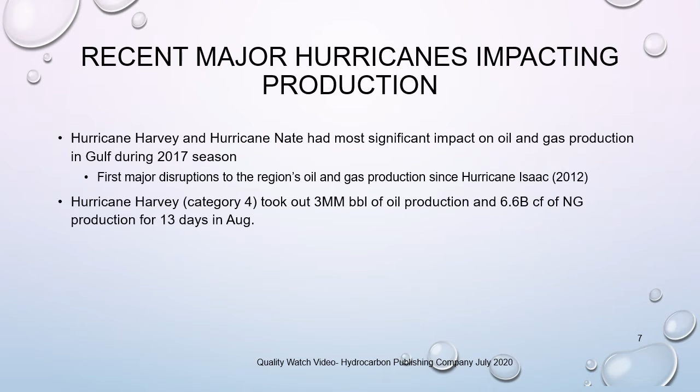The 2017 hurricane season saw Gulf of Mexico oil and gas production impacted by Hurricane Harvey in August and Hurricane Nate in October. The two hurricanes represented the first major disruptions to upstream operations in the region since Hurricane Isaac in 2012. Hurricane Harvey was a Category 4 storm that took out 3 million barrels of crude oil production and 6.6 billion cubic feet of natural gas production in August. Later that year, Hurricane Nate, a Category 1 storm, took out 8.4 million barrels of oil production and 11.8 billion cubic feet of natural gas output in October. Even though Nate was a smaller hurricane, its trajectory made it more disruptive to Gulf of Mexico production compared to Harvey.

Nearly a decade earlier, in 2005, Hurricanes Katrina and Rita, and in 2008, Hurricanes Ike and Gustav, had more significant impacts on upstream operations in the Gulf. These cases show how operators in the Gulf may often have to deal with hurricanes and associated issues.

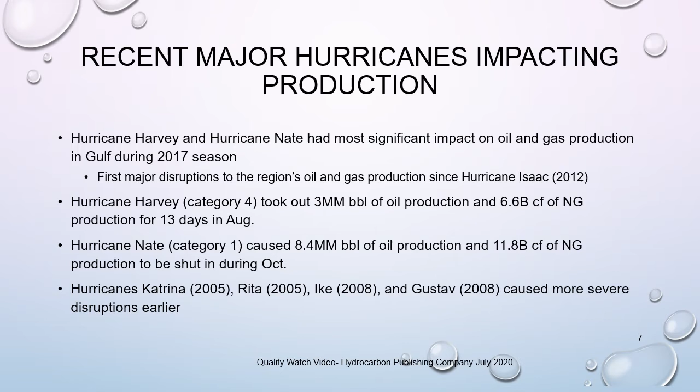If the hurricane threat is high, all manpower except essential personnel will be flown onshore to relative safety, and in many cases this results in wells being shut in for safety reasons. With any action as significant as shutting in a well, there are steps which have to be taken to safely carry this out. A depressurization of the near wellhead area must take place, and this can cause hydrate formation in the wellhead, jumpers, or pipeline as the temperature and pressure drop. This is a serious event which can take weeks to resolve.

To prevent this from happening, an inhibitor is used. Most commonly methanol or glycol is used as thermodynamic hydrate inhibitors. Monoethylene glycol has also been used by operators in the North Sea. Other inhibitors are also used, such as low-dosage hydrate inhibitors, and many of these have a methanol or isopropyl alcohol carrier. Meanwhile, methanol may remain in the oil phase after operations are started.

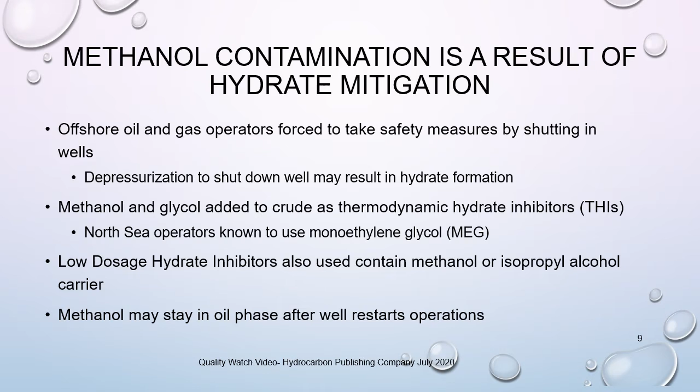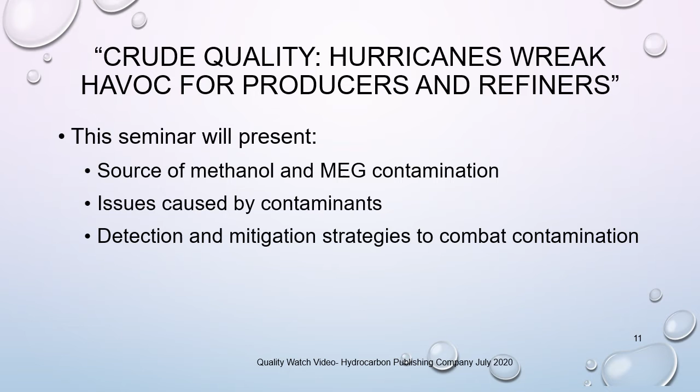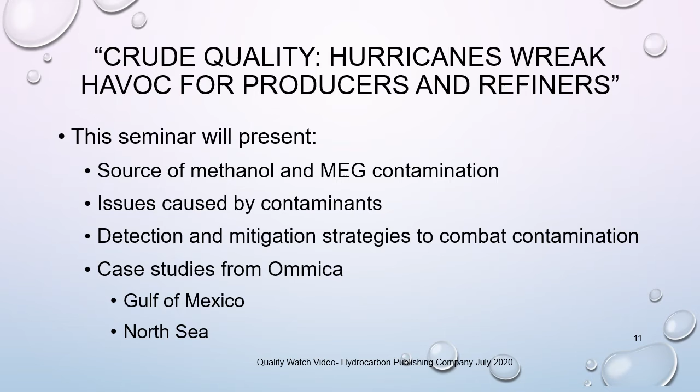This seminar will focus on the sources of methanol and monoethylene glycol contamination in crude oil. Issues caused by contamination for the refinery setting and for vendors will be covered. Detection and mitigation strategies will also be discussed. We will present 3 case studies from Ommica, 1 in the Gulf of Mexico and 2 in the North Sea. This webinar will take advantage of experiences gained from North Sea events to help operators deal with well shut-ins because of hurricanes in the U.S.

Methanol contamination may result in reduced value and increased costs. These financial impairments may come in the form of waiver fees, delays, and deferments. In addition, an installation with a history of selling crude with methanol contamination may find it increasingly difficult to sell volumes to customers.

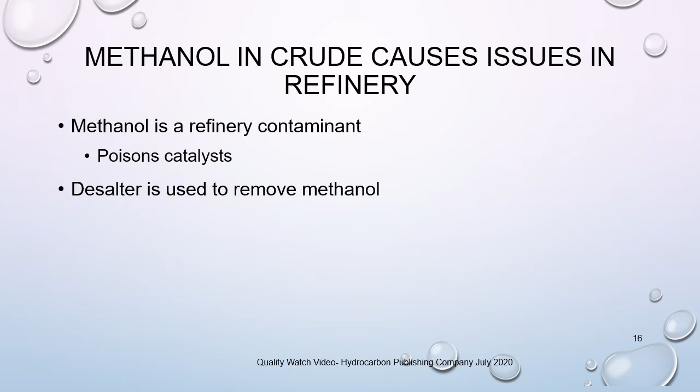Methanol is considered a contaminant in the refinery. One major issue with refinery contamination is the poisoning of catalysts. As a result, crude oil is fed through a desalter in order to remove methanol and other water-soluble contaminants. The wastewater from the desalter is then treated with microbes. However, excess methanol content may kill the microbes used in the water treatment process, which will pose an environmental hazard when the wastewater is released. In addition, methanol contamination in crude lowers the crude cloud point, or wax appearance temperature.

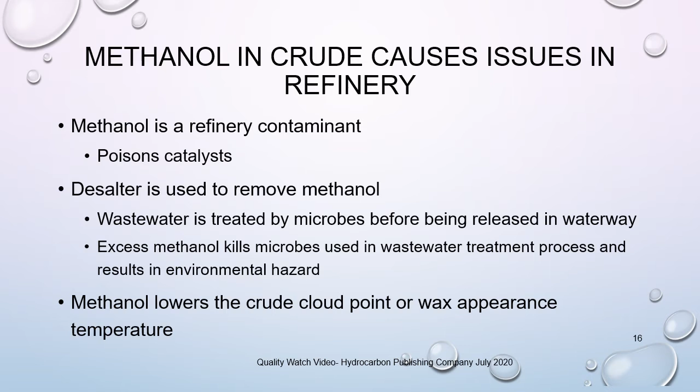Operators have ways of abating the effect of methanol contamination. First, they can wash the methanol out of the crude before it leaves the installation, which requires offshore installation of the wash plant and checking of crude.

Secondly, operators can quarantine contaminated crude and dose into clean crude, keeping the level under the limit, which requires sufficient storage for crude production volumes.

Another option may be diluting in crude from other installations that co-mingle with the contaminated crude, which is not always possible. Finally, operators can dilute in cargo tanks when floating production storage and offloading units offload to cargo vessels, which requires proper management of levels.

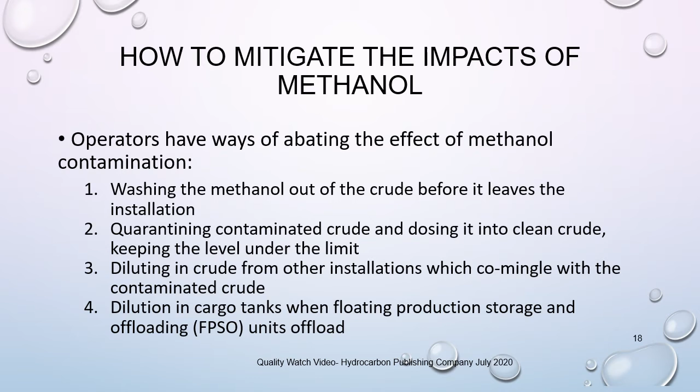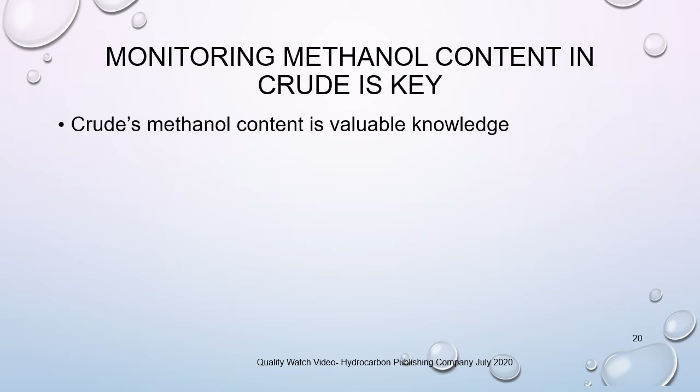There are many reasons why monitoring methanol content in crude is important. Monitoring levels of methanol gives both the operator and the refinery, pipeline owner, and terminal confidence in the levels of methanol in the crude. Having this knowledge means there is more flexibility with incoming refinery crude, and upstream operators will have the confidence to report levels of methanol without incurring penalties. Both of these give significant commercial benefits.

There are ways to monitor methanol content accurately on an offshore oil installation. Gas chromatography is the most recognized method. However, the capital and operating expenditures required to run such technically advanced equipment offshore is very high, and many operators send samples onshore for analysis in labs using gas chromatography.

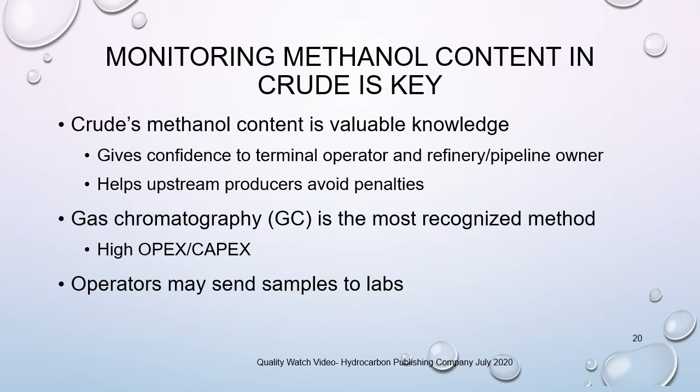As time is of the essence, sending hazardous samples onshore with delays in shipping and processing before they can be tested in a commercial lab is not optimal. Methanol levels are required in near real time in order to mitigate issues at the moment.

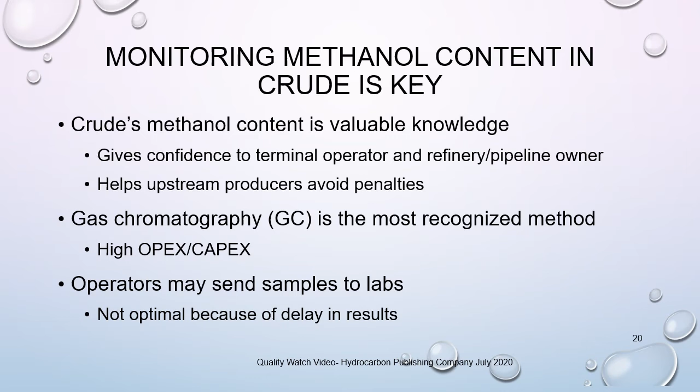OMMICA is a portable, accurate, robust, simple-to-use colorimetric test, which can give on-site results within the hour, and at an accuracy of plus or minus 2% at 50 parts per million.

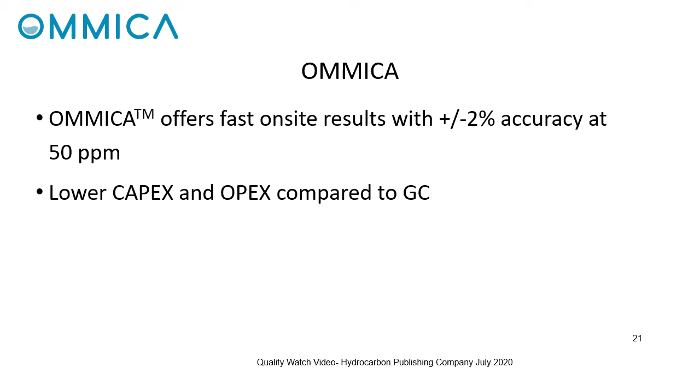OMMICA also offers far cheaper capital and operational expenditures than gas chromatography for operators and terminals to analyze portions of crude oil and manage crude content.

The following case history illustrates how useful OMMICA can be in reducing penalties and confirming permits for methanol are not exceeded. The first case history involves a pipeline operator in the Gulf of Mexico, while 2 separate case histories from the North Sea will also be presented.

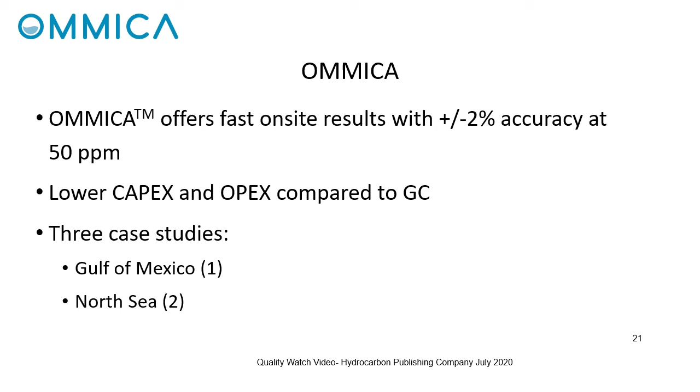An operator in the Gulf of Mexico pigging a mothballed pipeline containing oil, water and methanol had been given a 4-day permit to manage the methanol levels in the produced oil to below 50 parts per million. Failure to carry this out within the required time scale would result in penalties at significant cost.

As a result, the operator needed to monitor methanol levels throughout the day so that informed management decisions could be made. Therefore, it was not practical to wait for test results from an onshore lab, and the operator needed a way to test on-site. The operator chose to use OMMICA.

It is an on-site test, which can be carried out using limited space and skill, and allows results to be gained on site within the hour, allowing the operator to make informed crude management decisions.

The asset has a production rate of 40,000 barrels of oil per day, and only 500 barrels of water, so there was limited produced water available to wash the methanol from the crude. A limited amount of additional vessel water was added to this, to help bring the levels down quicker, but the operator needed to be sure they were making the most effective use of this capability.

Testing of samples was carried out at regular intervals, and initially showed methanol levels in the crude to be over 1,000 parts per million. These were seen to drop over the 4-day period of the permit, and a significant number of samples had been confirmed below 50 parts per million, within the time limit of the permit.

For the operator, it was very important that it could be confirmed this quickly that production was back within their permit limits before their time limit ran out to avoid paying additional fines.

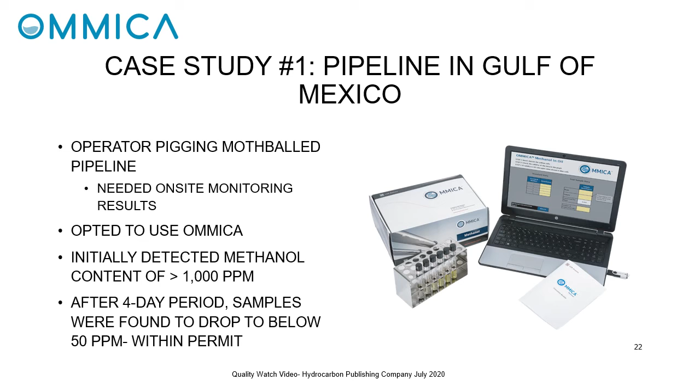The results from testing can be seen here. Using OMMICA allowed the operator to monitor the methanol levels at the lease automatic custody transfer separator and make decisions before the crude was exported. This meant that they could trend the concentration of the methanol as it decreased over time and confirm the point at which production fell below 50 parts per million.

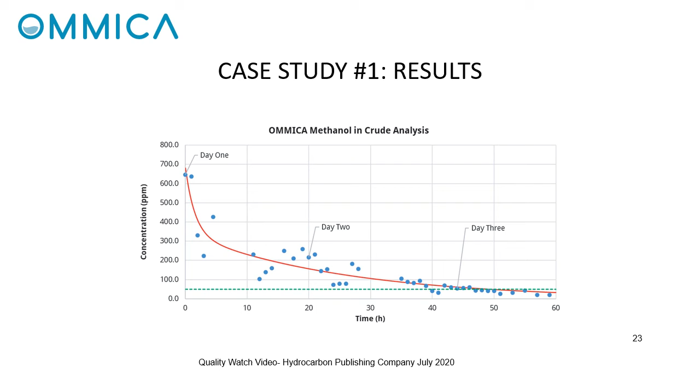This gave the operator confidence in informing the refinery of the amount of methanol in the cargo, and could also confirm that the permit had not been exceeded, saving on potential penalties. Note: lease automatic custody transfer means automatic gauging, sampling and shipping of oil from the lease storage tank farm to pipelines.

An international operator with an installation in the North Sea felt they were paying excessive waiver fees to export crude oil into the Forties pipeline system, following the use of methanol when wells were restarted through maintenance and other issues. In addition, the previously agreed partitioning with the Forties pipeline system was considered high and commercially costly.

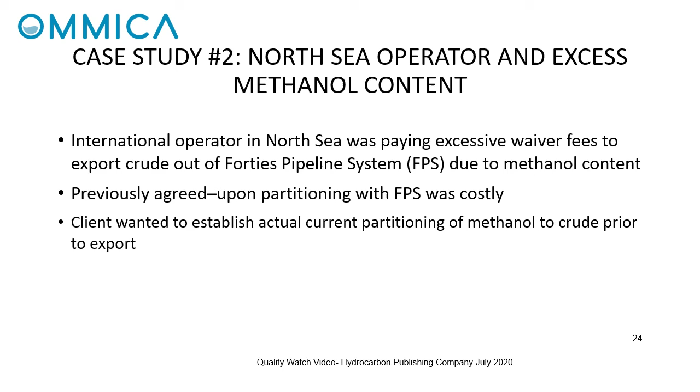As a result, the client wanted to establish the actual current partitioning of methanol to the crude oil prior to its export from the installation. In order for this to be achieved, a fast, on-site test method which could accurately assess levels of methanol was required. However, the traditional process of gas chromatography would involve sending samples onshore for laboratory testing, and would take weeks to obtain results.

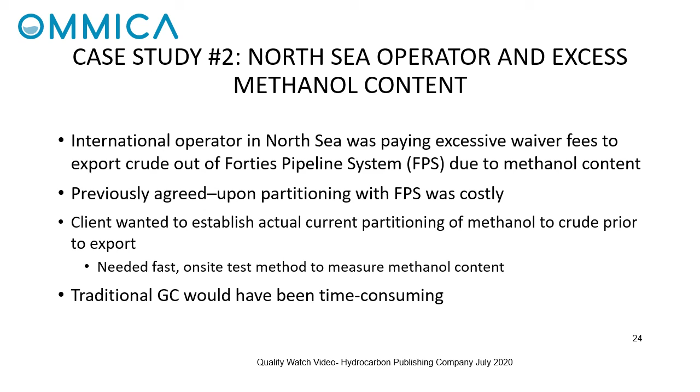The operator opted to carry out OMMICA tests on both oil and water samples regularly during startup, to establish the relevant partitioning to each phase. Partitioning to the gas phase was also calculated.

This showed that partitioning to the oil phase is significantly lower than expected, possibly due to changing conditions over time. The results from Ommica were used to demonstrate that the current actual amount of methanol in crude oil, to the pipeline owner, was lower than the historically agreed value.

Afterwards, both the operator and the pipeline owner used the results from Ommica to agree to a new partitioning for methanol in crude from that installation. As a result, the operator was able to save $1 million every year in waiver fees.

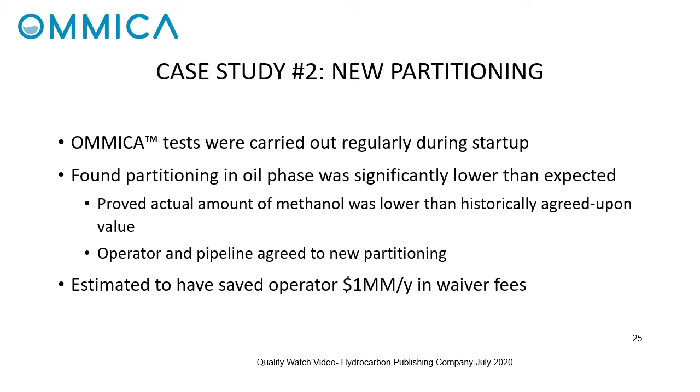A newly commissioned oil installation in the North Sea uses continuous injection of monoethylene glycol to prevent hydrate formation in flow lines. In initial operations, there can be a higher than normal loss of monoethylene glycol into the crude oil stream, prior to achieving stability in the monoethylene glycol regeneration unit, with resultant increase in costs to replace the monoethylene glycol. As monoethylene glycol is considered a crude contaminant, it can lead to unwillingness of the refinery to accept cargo shipments containing excessive levels of monoethylene glycol.

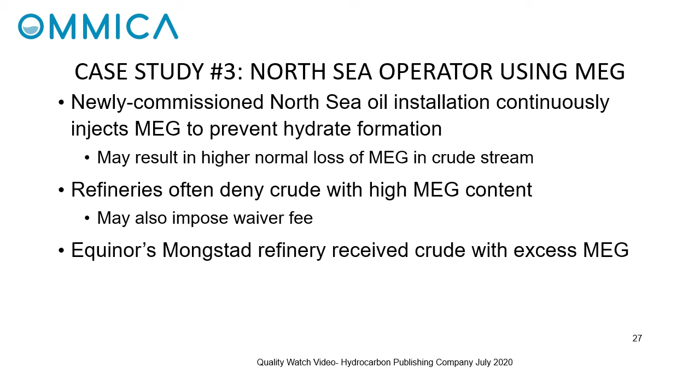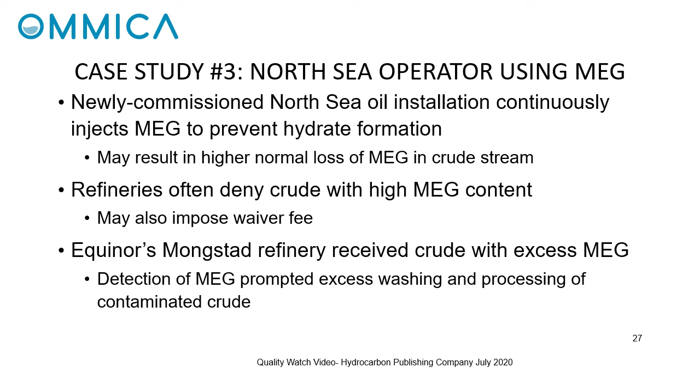The refinery may also impose a waiver fee due to monoethylene glycol contamination. Equinor's Mongstad refinery received such a shipment of cargo crude. This shows that prompt analysis of monoethylene glycol content in crude oil to be processed at the refinery was essential. Results from this analysis allowed informed decisions to be made regarding potential additional washing and processing of the contaminated cargo crude. Use of gas chromatography for measuring monoethylene glycol in oil analysis is widely recognized.

However, in this instance, it was not practical to analyze the samples using gas chromatography in the short time frame given. In addition, multiple samples were to be tested, and OMMICA was found more suitable than gas chromatography. Following the creation of a standard curve using the OMMICA kit reagents, samples of oil from the cargo tankers were received and analyzed using OMMICA oil analysis kits.

The successful outcome of this correlation testing meant that Equinor Mongstad continued to use OMMICA at the refinery laboratory to analyze for monoethylene glycol in oil samples from suspect cargo crude shipments.

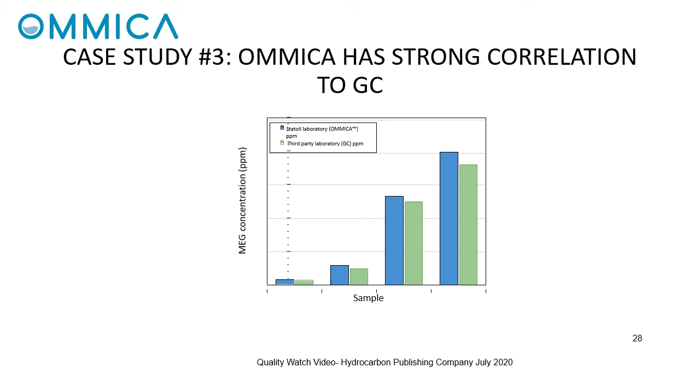The importance of having up-to-date information on levels of contaminants, such as methanol in crude oil, cannot be underestimated, as the commercial cost of penalties, reduced revenue or refusal are significant. In today's climate, these are costs which will not go unnoticed, but can be managed and in many cases avoided, by some simple testing upstream, giving operators, pipeline owners and refineries confidence and flexibility when processing opportunity crudes.

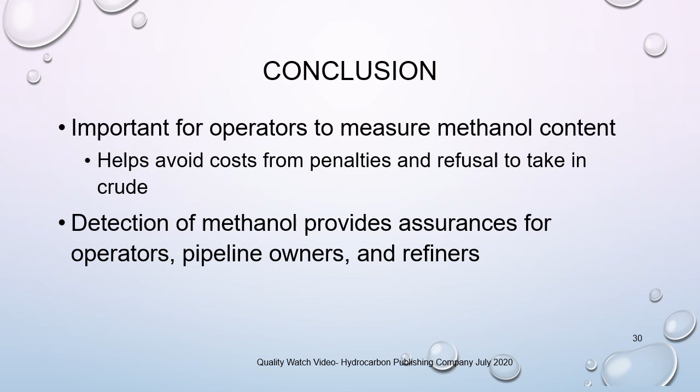Refiners should not let the hurricane season cause more issues than it already presents, resulting in the legacy of contaminated crudes and their costs. Instead, they should test crude samples to obtain information upstream and ensure best revenue, cost savings and flexibility.

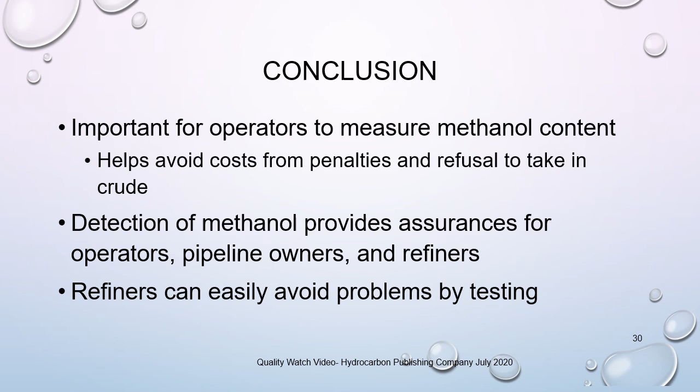OMMICA was developed specifically for the oil and gas industry, as a way of allowing an on-site, accurate, portable, simple analysis for monoethylene glycol and methanol in oil and water. It has been successfully used for over 5 years by many global operators including Chevron, Oxy, Shell, ExxonMobil, Inpex, Eni, in a wide range of geographical areas such as the Gulf of Mexico, North Sea, West Africa, the Middle East, Australia, the Mediterranean, and Alaska. Many of whom are regular purchasers and continue to experience the benefits of OMMICA testing.